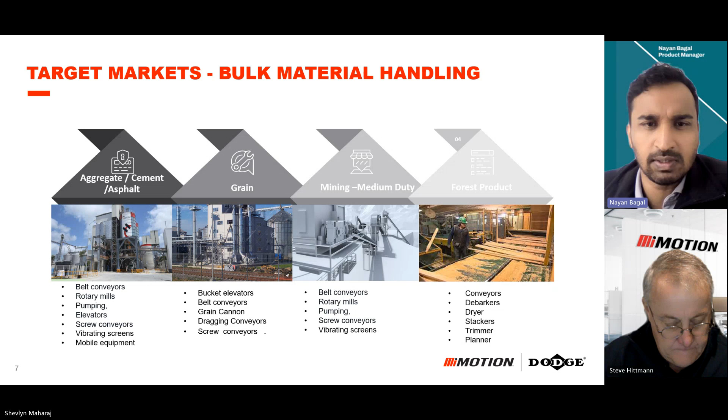Steve, would you like to?

As Nayan mentioned, and as I mentioned before in our introduction, both Dodge and Motion have had a fantastic relationship over the last 40 years, both in Australia and over in the US. Actually, over in the US, Dodge is Motion's number one supplier as far as revenue is concerned. So we hold their relationship very close to us, and it is very valuable for both us and for Dodge here in Australia to cover that bulk materials handling market.

Thanks, Nayan. Yeah, thanks, Steve. So now let's move to the product. The target products are torque arm, motorized torque arm, which is gearing, ISN bearings, Raptor, and CEMA.

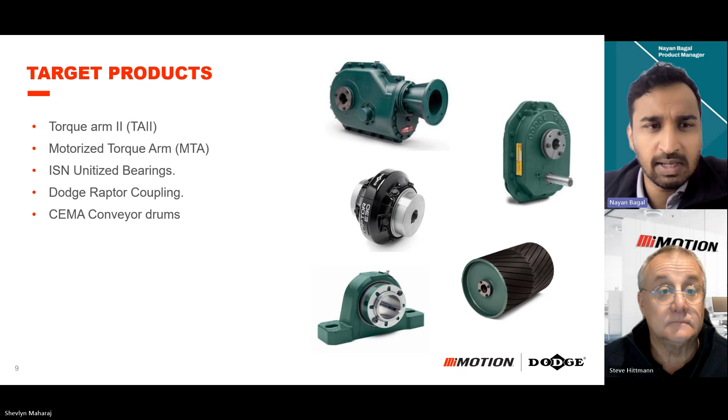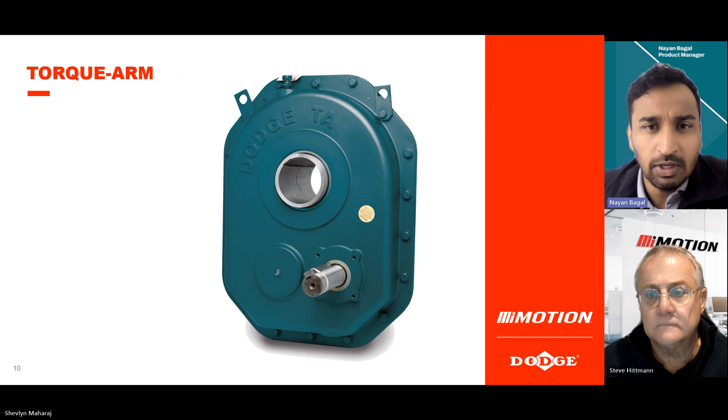Let's start with torque arm, or we also call it torque arm 2. This is our belt-driven gearbox. As you see in the picture, this is the product which we actually introduced first in the market, and then eventually we came with the next product range.

So the roots are pretty old. It goes back to 1949 or 50, where we initially introduced a belt product or belt-driven gearbox, and then subsequently in future years, with a lot of R&D, we came up with the screw conveyor design in 1962, followed by the twin taper bushing, which makes gearbox installation and removal pretty easy. That innovation in 1972 changed the way gearboxes are mounted or removed from the shafts. We launched the TXT series in 1988, which is still very popular within the US, and is used widely in most industries and applications.

TA2 was the next version of TXT, launched in 2000. A lot of the time we encourage customers to actually replace TXT with TA2 because it's a new, innovative design and has been in the industry for almost, I would say, 20 to 25 years. And in 2007, we came up with the motorized torque arm, where we decided to produce a gearbox where we remove the belt drive system and make it more compact and a clean drive, where you can mount the motor onto the gearbox and it becomes a motorized torque arm.

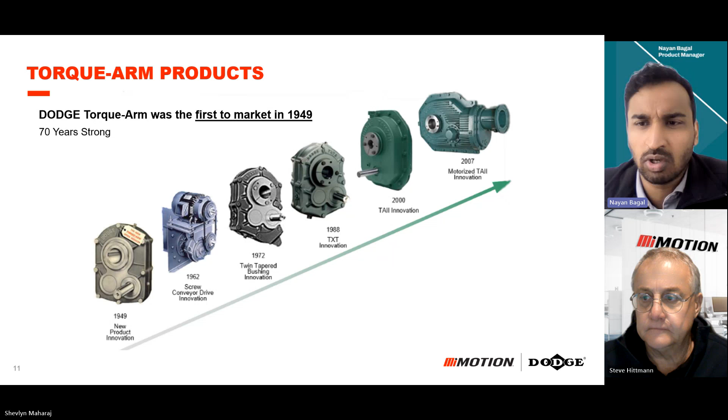In TA2, again it has a pretty long history, and we say it is a shaft-mounted belt reducer. It obviously requires V belts to drive it. Standard ratios are 5, 9, 15, 25, 40. However, with the belt drive, you can actually achieve numerous speed requirements. That's the reason this is still a very popular drive within the industry with the belt drive. Twin taper bushing is part of this drive, so you need the twin taper bushing to mount this box onto the shaft or for its removal.

They are designed for very high duty service. They can work very well with harsh environments, high shock loads, dusty environments, and where durability is very critical, or you can't afford downtime. That's where this product goes and performs really well.

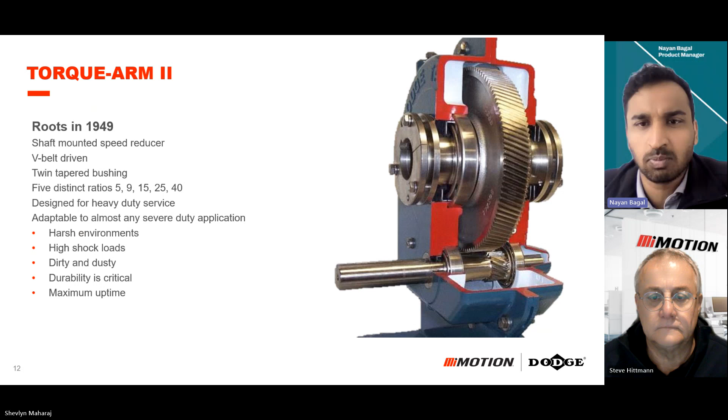In TA2, we have almost 12 sizes, starting from size 0 to size 12. There are a lot of accessories which go along with that, which help improve the performance of the gearbox. Our TA2s are designed with AGMA standards, which is the American Gear Manufacturers Association.

The taper roller bearing is part of this gearbox, which I'll talk about in the next few slides. This gearbox has a backstop - it's an additional feature if you want it, and that can work with EP additives. The primary oil seal is made up of a very high quality rubber material, which has a temperature range of minus 40 to 150 degrees.

It can be mounted straight onto the shaft of the twin taper. It has a screw conveyor arrangement as well. It can be mounted vertically or at an angle as well.

Some applications require the gearbox to be mounted at a certain angle, and that's where we get involved, suggesting what sort of oil level needs to be maintained, or any other precautions or additional accessories the customer needs to purchase while purchasing the gearbox. Again, standard ratios pretty much cover most of the speed requirements, which makes it easy to replace other manufacturer boxes.

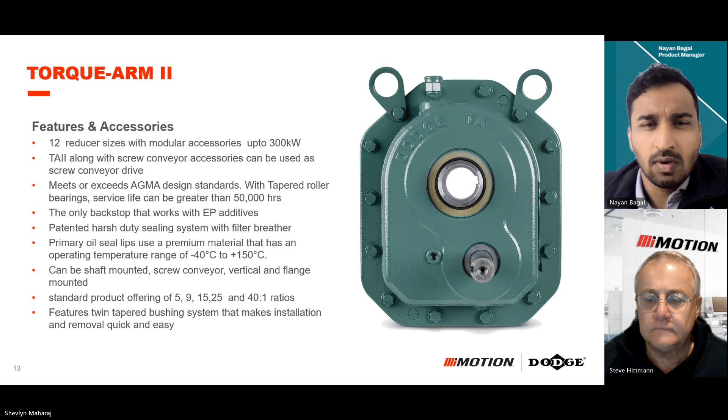About the twin taper - this is some sort of a pioneer thing which Dodge developed, and it has been popular for so long. This is one of the best features of our gearbox, where mounting and dismounting become very easy. The twin taper means you actually get twin taper bushings, which are two bushings.

One comes on the front of the gearbox, one comes at the back of the gearbox. The way these bushings are developed makes mounting this gearbox onto the shaft pretty quick. The best part is the dismounting.

If you have to take off the gearbox for any maintenance purpose or checks, it really takes 15-20 minutes to remove the gearbox.

However, most of the time, if the gearbox runs for years and years, you may have to gas cut the shaft, or it becomes very hard to remove the gearboxes. We have seen some customers, and heard stories about customers having nightmares trying to remove these gearboxes from the shaft.

Imagine you have a conveyor at a high tower, and something fails at night, and you have to take off the gearbox and put a new one. These things make it so easy. Otherwise, you have to cut the shaft and make a new pulley or new shaft, and that's how this became very popular for installation as well as removal.

Now, in twin taper, we actually have two designs. We have a standard twin taper, which is the topmost image, and the bottom is the short shaft. A lot of other products or gearboxes have a much smaller shaft length requirement and width.

That is because we use AGMA standards, our gears are much wider. So our gearboxes have a much wider width compared to others. So when you're trying to replace other boxes, you may find that the shaft length or the key seat is not good enough or doesn't have sufficient length to put the Dodge box on it.

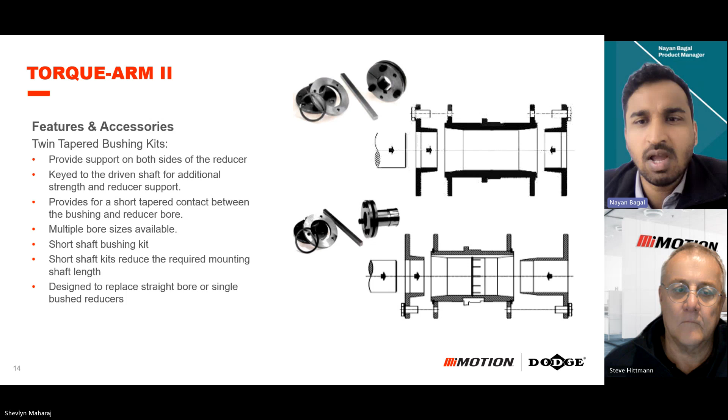That's where the short shaft bushing comes into the picture - on the right hand side bottom, there is an elongated portion within the bush itself, which supports the shorter length of the existing shaft. So if we are trying to replace a competitor box, we don't encourage or request the customer to change the shaft. We can still manage with the existing shaft using the short shaft bushing, and we still install a Dodge gearbox on it.

Bearing is again one of the important parts of the gearing, and what Dodge has done over time is try to understand the causes of problems and failures on these gearboxes, and we try to address all those problems when we develop these boxes.

In most cases, almost all competitors use either spherical roller bearings or ball bearings in their gearboxes. What Dodge uses is a taper roller bearing. So all our TA2 or MTA comes with taper roller - each and every bearing is a taper roller bearing, because these boxes will always experience thrust load, shocks, vibrations, and taper roller bearings are the best among all to handle those kinds of shock loads and thrust. That's where I think we score well, supplying all the boxes with a taper roller bearing.

Our L10 life of these bearings is 50,000 hours. As you understand, L10 life is sort of a calculated life considering all the factors, whether it's the temperature, lubrication, the dynamic loading on the bearing, the duty hours - whatever the worst situation these bearings can be withstanding.

Most of the other products are within the range of 20,000 to 25,000 hours of L10 life. We almost have double the L10 life in terms of bearing, and that increases the life of the whole gearbox. The bottom line is, Dodge is almost double the life in terms of bearing compared to the other competitor, because we use taper roller bearing, which is a high quality, expensive bearing, but we want to make sure we supply something that will last long because that's what these applications demand.

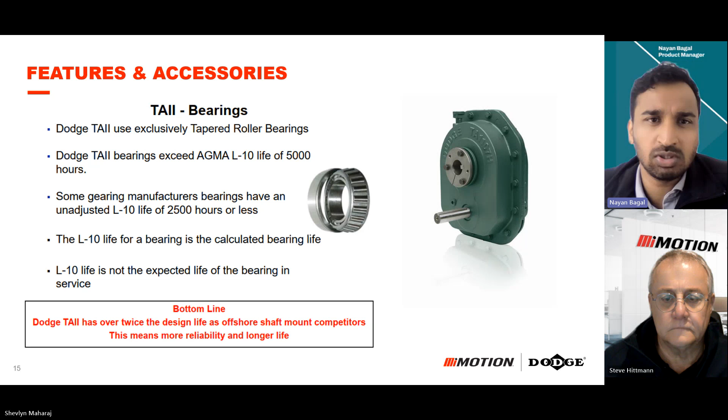Sealing is another best feature. It's a subcomponent of the gearbox which may have the least value in terms of dollar, but it plays a very important role. Sealing keeps the dust or moisture out, restricting them from entering into the box.

What Dodge develops is our seals are HNBR, hydrogenated nitrile butadiene rubber. Standard NBR seals get treated with hydrogen, which changes their structural behavior. We normally call that high saturated nitrile rubber, which makes them highly resistant to heat, highly resistant to wear, gives them high tensile strength, and high abrasion resistance. All these features add to the seals so their life goes up 5 to 6 times over the standard NBR seal used in most gearboxes.

If the seals start failing early, that's where dust and moisture start getting inside the gearboxes, which eventually fails the bearings and the gearing. So we try to address the root cause of these problems by offering better sealing.

Our sealings have a design which can be used in a bidirectional rotation of the boxes. They can work within -40 to 150 degrees Celsius, so it's a pretty decent range. We also have a harsh duty V-ring kit.

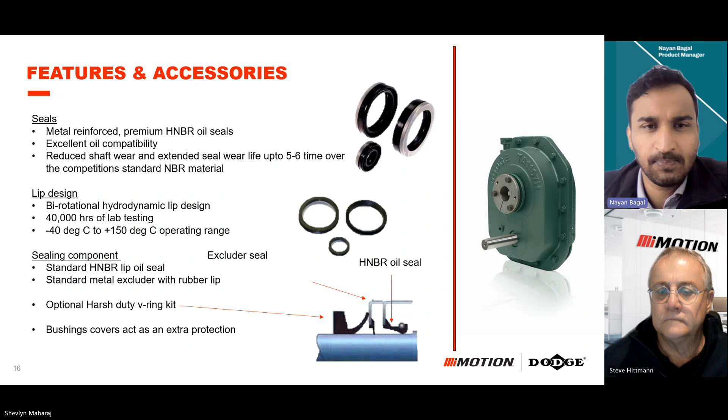Backstop is another feature. You must have noticed a lot of these conveyors are inclined, and these conveyors will tend to roll back when there is no power or the gearbox has stopped. So we need a backstop to stop the back rolling of the conveyor.

Dodge has a backstop which can be externally mounted, meaning you don't have to open the gearbox to mount the backstop. These backstops are designed to work with extreme pressure lubricant, which is not the case with other manufacturers. Their backstops will slip if exposed to high extreme pressure lubricants, which means they can't use good quality lubricants, and that impacts the life of the whole gearbox.

These are lift-off style backstops. Their capacity is pretty high, about 350% higher than the sprag style. They work without any failures and give a good feature to avoid the rollback of these conveyors.

As I said, we don't have to open the box. They're externally mounted, so it's a very neat and clean mounting, and you don't actually touch the warranty of the gearbox.

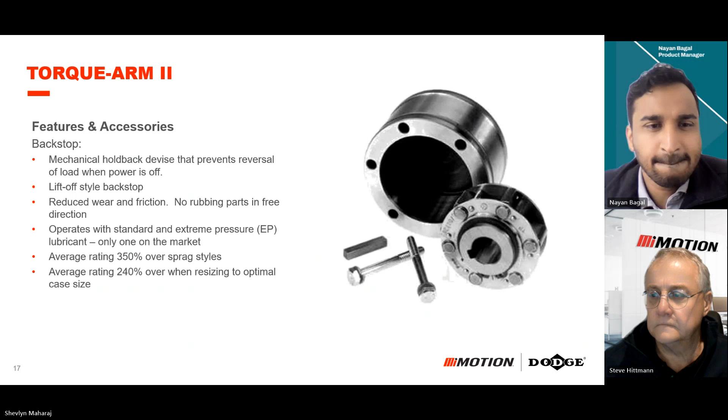We do have covers as well, open cover and closed cover. The open cover comes on the pulley side, and the closed cover at the back of the gearbox protects the bushing and the sealing. The twin taper bushing tie rod kit is a must.

You need to have a tie rod to attach the gearbox to the structure, and then you need a twin taper bushing to mount the gearbox onto the shaft. That is supplied with the key as well, so it's a very secure connection between the gearbox and the shaft.

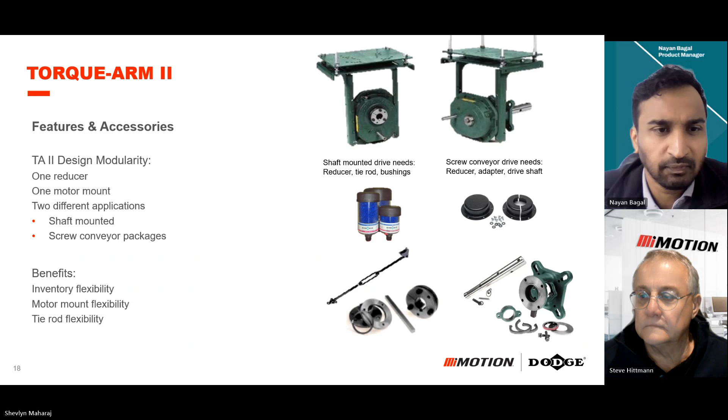Moving to a motorized torque arm, this is the next generation of the TA2, where pretty much all the innovations done in TA2 have carried forward to MTA. On top of that, we removed the belt drive and started using a direct motor on it.

The MTA has a variety of ratios. It ranges from 17, 18 up to 65 or 70. We have 8 sizes in this, and that's pretty much what we stock in Australia.

This is a good combination where the customer wants to get rid of the belt drive and install a clean, neat drive like this. It's very popular on bucket elevators or belt feeders, or conveyors where we have compact space, and a lot of the time customers use dual drives on either side of the pulley. They've been pretty popular since they launched in 2007.

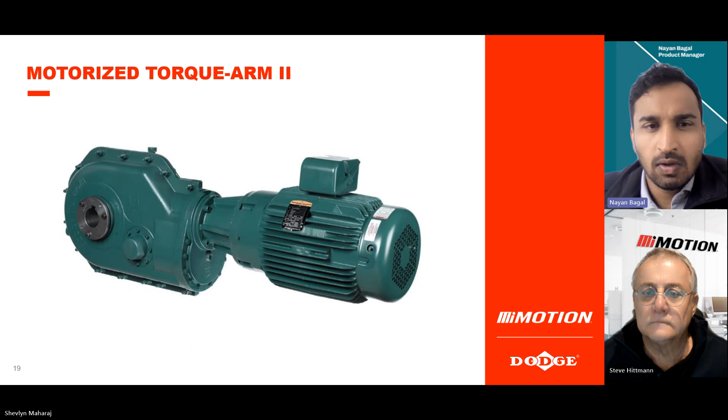They're rated for AGMA, designed to AGMA standards, so heavy gearing, wide gearing, they can go up to 75 kilowatt installed power. We also came up with new sizes - size 9, 10, and 12 - which can go to much higher ratings, and we can now supply those as well.

We don't stock them in Australia currently, however we have them in the product line now. So if anyone has a larger kilowatt requirement, we can actually supply them.

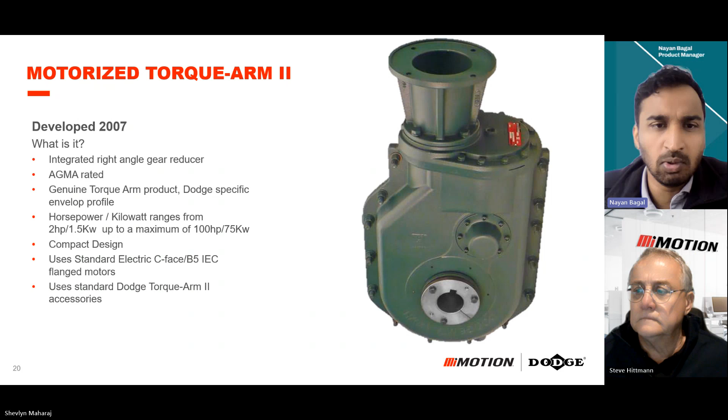They can be installed with a C-face B5 IEC motor, so any make of motor is good enough - you just need a B5 IEC flange and use the same standard accessories which we use for TA2. So the accessories for the belt drive gearbox and for MTA are the same, which reduces your inventory. If your plant has TA2 and MTA together, you can still maintain minimum accessories required because it's pretty common between these two boxes.

In other manufacturers' designs, the pinion bearing is only supported on one side and not the other, which leads to failure from vibrations at high speed and shock loads, eventually causing the pinion to fail. Our design has the input shaft and pinion made of a single metal piece. In contrast, other manufacturers' pinions are press fit onto the input shaft, which becomes a weak link when transmitting torque and a reason for failure. That's a significant development Dodge has made in how we mount our input pinion.

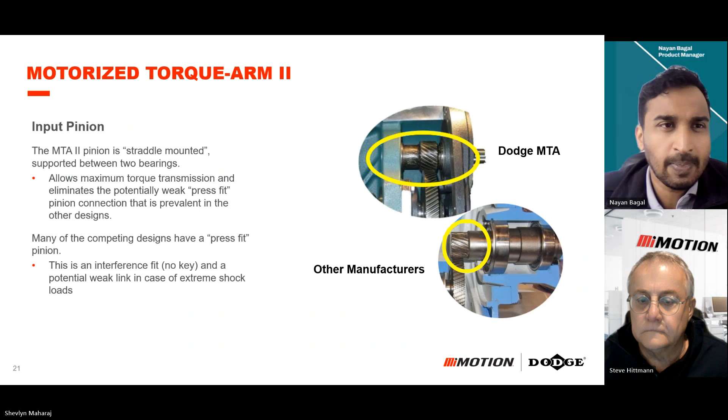As I said, these motors require a B5 flange to mount or attach to the gearbox. We call this a dry face because if you ever need to remove the motor for maintenance or remove the coupling, there'll be no oil leakage - the gearbox doesn't open when you take off the motor. It's a neat and clean design.

In most other cases, if you have to remove the motor or coupling, the gearbox actually opens and you have to drain the oil as well, which is not the case with ours. You can remove the motor and coupling for maintenance or checking, and the oil remains as is - the gearbox won't open, and we don't compromise on gearbox warranty. You don't have to do pre-assembly, so if the motor has a problem or failure, it's easy and convenient to replace the motor on top of this gearbox.

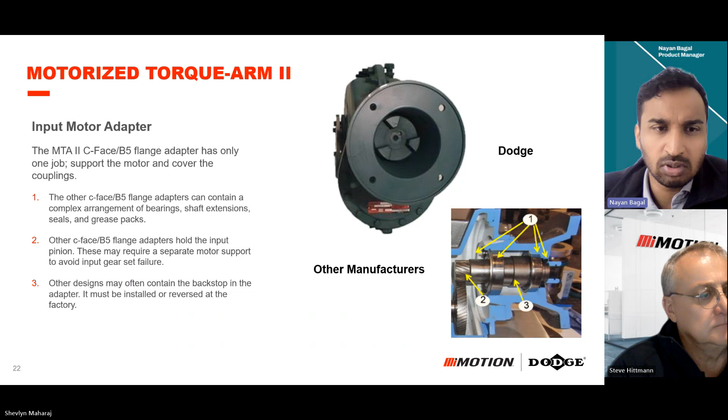These gearboxes carry the same seal as TA2, which is HNBR sealing. All the bearings in these gearboxes are taper roller bearings, so they will last longer compared to ball bearings and spherical roller bearings. The backstop in these gearboxes can be mounted externally, so you don't have to open the gearbox to mount the backstop.

So pretty much every feature introduced in TA2 carried forward into MTA. On top of that, there's a better pinion design supported by bearings on both sides, with a single piece pinion. So there's a lot of advantages of using MTA over TA2.

You remove the belt and you can still achieve good speed or various speeds, because we have ratios ranging from 17 to 65 or 70. So it's a pretty decent product, with a very compact design, to replace the belt drive.

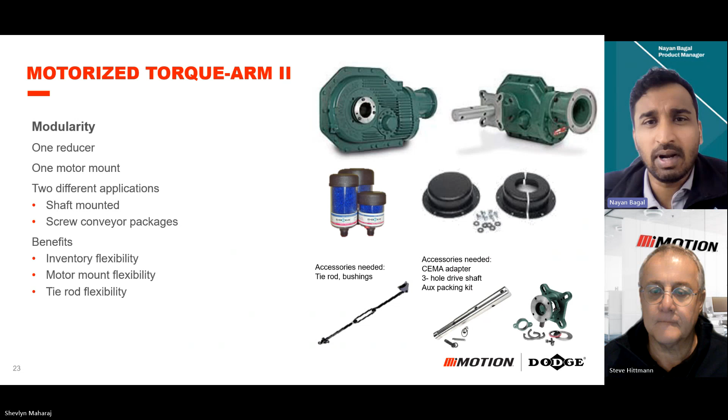About this gearing, TA2 and MTA are pretty much in stock. We have a huge stock across the entire range within Australia, and Motion is equally stocking this product across their stocking locations in Australia, covering New South Wales, Queensland, and WA. So all the sizes and all the accessories are in stock with Motion and Dodge.

So if you have any specific requirement, we are pretty quick to supply. Our turnaround is very quick. We have supplied before where we talk to the customer, provide a solution, get the order, and supply by end of the day, and the next day morning the drives are installed. Our turnaround time is pretty quick because of the way we carry stock along with Motion across the country. So if you have any requirements specific to that, we are pretty quick to supply and solve the problem.

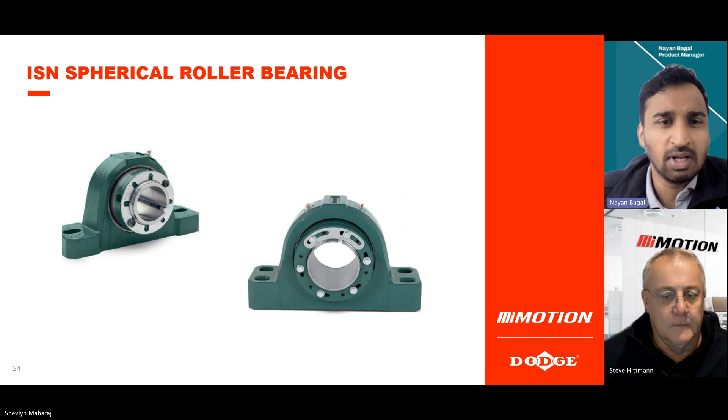Moving to the next one is the ISN. ISN is one of the products of our entire bearing range. This is a spherical roller bearing. The I actually stands for Imperial SN style.

So this bearing housing unit was developed to actually replace the SN style bearing. The dimensions exactly match the SN, so bolt centers will match the SN style as well as the center height. Initially, when it launched, it was only Imperial sizes, but now we have them in metric as well.

Very popular product in Australia and globally. We stock them in our Dandenong warehouse, and again it's one part number.

You don't have to order multiple parts like what you see in the left hand side picture, which is the conventional case. We bring this bearing pre-assembled, as you see in the right side picture, from the factory. It's pre-assembled and pre-lubricated, coming as a complete assembly. So it's sort of taking it out of the box and sliding it onto the shaft to install it. We don't have to order multiple parts or do the installation or assembly ourselves.

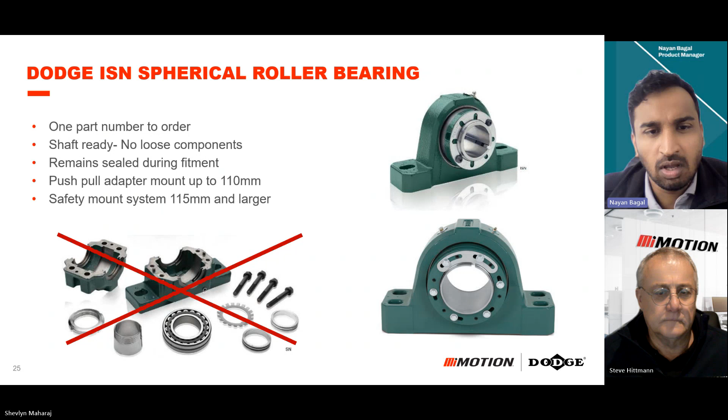We have a push and pull adapter locking system for sizes up to 110, and above that we have a safety mount concept, which makes it easier and requires much less torque compared to conventional bearings.

As I said, Dodge is the inventor, or holds a patent, on the ISN integral adapter system. What we use is an adapter sleeve, used along with the lock nut, to mount these bearings, which makes mounting and dismounting pretty easy. It naturally takes about 15-20 minutes to mount the bearings, and we do not need experts or specialized fitters to mount them. If we follow the manual instructions, it's pretty quick to install.

What we need to do is, depending on the diameter of the shaft, decide how many rotations to give the lock nut, and that automatically sets the clearance in the bearing. That's it - easy installation in 15 minutes. Similarly, when you reverse the lock nut, the adapter sleeve expands and releases the bearing from the shaft. So it's a highly patented technology, which we call the push and pull mount arrangement.

So again, the whole adapter sleeve will be touching the shaft, so it achieves the clearance and it will set like that. The seals are, if you look at the picture, actually not touching the shaft.

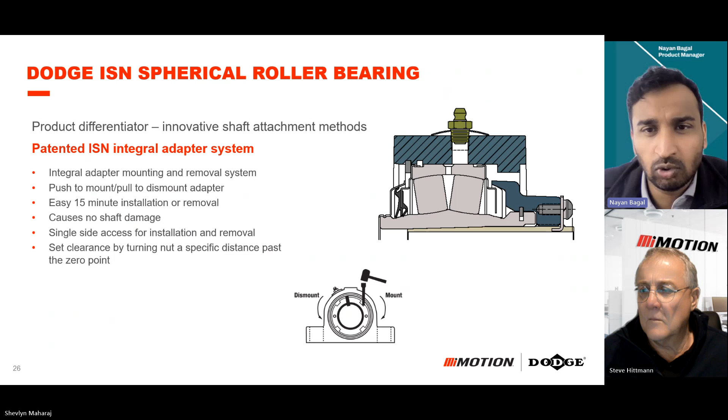They're on the inner race of the bearing, and the main purpose of these seals is to protect the spherical rollers. We'll talk about sealing in the next slides, but this bearing also comes as non-expansion and expansion. By easy switchover of the locating ring between the slots, we can convert this bearing from expansion to non-expansion.

Again, like in gearing, we invested a lot of R&D and time to develop good seals for this bearing, because I believe seals improve the life of any mechanical product like gearboxes or bearings. Our seals are the Trident triple lip seal, made of nitrile rubber. They have contact at three different locations, and the way these seals are developed means they last long in high dusty and dirty environments.

We have standard Trident seals. We also have labyrinth seals, which are normally used for high temperature and high speed applications. We can supply covers also to add for additional safety and protect the seals. Depending on the application or temperature range, we can supply labyrinth seals as well, and we stock them in Australia. So ISN with the labyrinth seals and ISN with the Trident seals are stocked in Australia, and we supply them per the customer requirement and the application requirement.

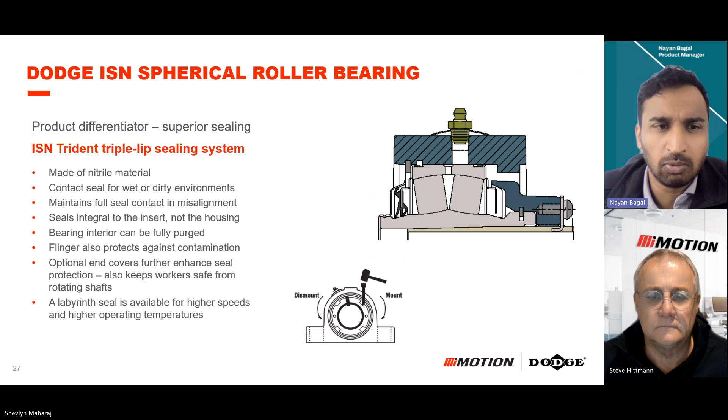If it's a new design, we gather some information and then suggest the best solution for the application. A lot of times we've seen the Trident seals failing, so we go to the root cause and try to see if we can offer a labyrinth seal which can solve the problem.

The seals are designed in such a way that they have a chamfer or tapered angle when they touch the inner race, and the design is meant to push out the old grease and the dust.

So how we actually grease these bearings is when the bearings are in application and running, that's where we start pumping new grease into the bearing, which pushes the old grease along with the dirt and moisture out of the bearing. You keep putting grease in until you see the new grease coming out or purging from the seals, and that's how we ensure the old grease has come out and it's now filled with new grease.

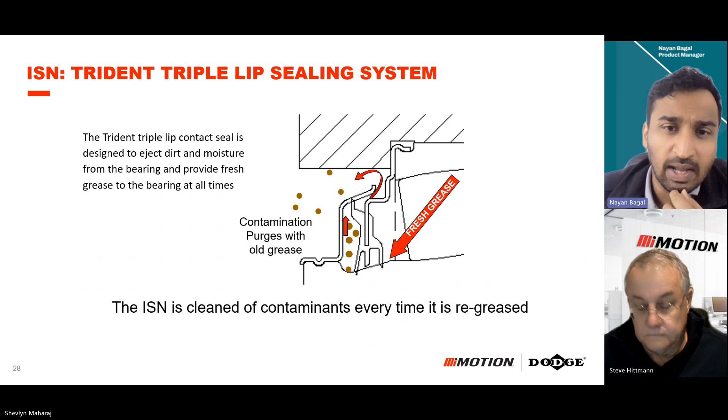This makes the maintenance of this bearing pretty easy. It also reduces the greasing requirement. For an initial fill, we're talking 60 to 70% less grease, and for the refill, about 15 to 20% less grease compared to a conventional bearing. So the seal design helps to re-grease this bearing easily, and we can save a lot of time and money on greasing.

ISN has a few other styles, or different style bearings. We have two bolt design, circular flange, four bolt design, IP style bearings, take up units, and square flange. They all have a common insert, so we have a single insert that can be used in all these bearings. Our insert is a complete unit which has the lock nut, sleeve, the bearing itself, and seal.

So this comes as a complete unit again, and you can just replace that into the existing housing if you don't want to change the housing.

This is the insert for higher capacity or higher diameter bearings, 110 and above, which we call the safety mount insert. Again, this is common for most of the spherical roller products.

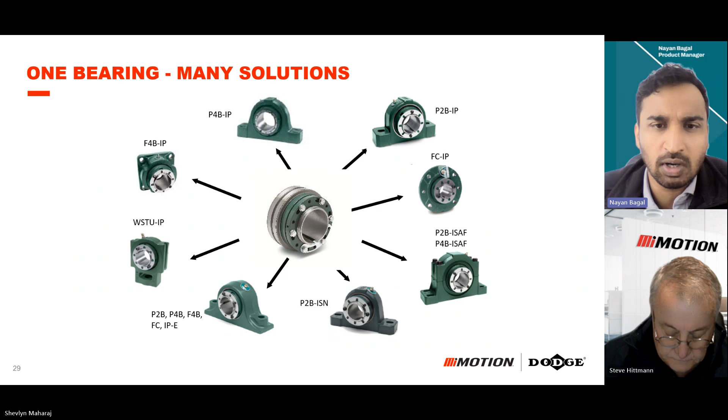ISN, as I said, is factory sealed and greased, so you don't have to assemble that at your location. Not every plant has a good facility to assemble these bearings in a clean environment, and most of the time the problem starts when you don't have a clean environment while assembling. Dirt gets trapped even before the bearing starts operation, and that's where failure starts, because once dirt gets trapped between the rollers, it leads to eventual bearing failure. So we remove that problem by assembling the bearing in a controlled factory environment by experts.

The patented sealing arrangement maximizes the life of this bearing and improves the way sealing of this bearing is conventionally done. Also, the way the seals are designed makes lubrication or maintenance of these bearings very easy. We save a lot of money and time on the grease fill as well.

It arrives in one piece, so it's ready to install, in sizes from 30 to 140 mm. We stock them in Australia, and if you have any specific size requirement, we also stock them in Imperial, because a lot of machines designed in America have Imperial ISN on them, and we can supply these Imperial ISN as well. Optional end covers are for additional safety.

We stock them in Australia as well. You do not need any specialized tool to mount these bearings. We do stock C spanners to rotate the lock nut, but that can be done with your existing equipment as well. So it's not necessary to have any specialized tools or special skill to mount these bearings.

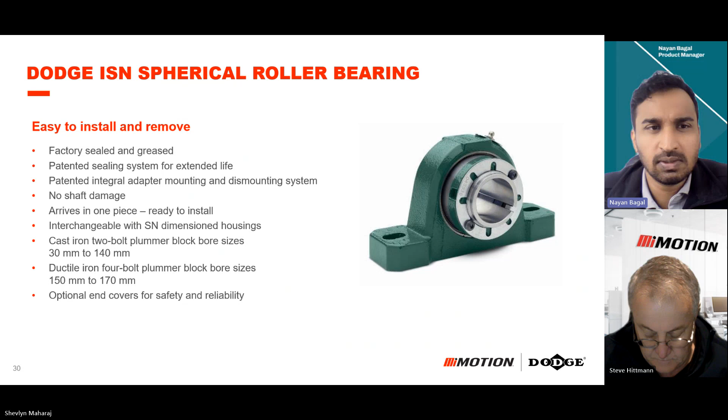Our next product is the Raptor coupling. A pretty popular coupling, launched 4 to 5 years back, and it's a big hit in the US and in Australia as well. It's from the range of our tire coupling range, used in the pump industry, compressor industry, material handling, cement, and we have good success of this product across the globe and in Australia.

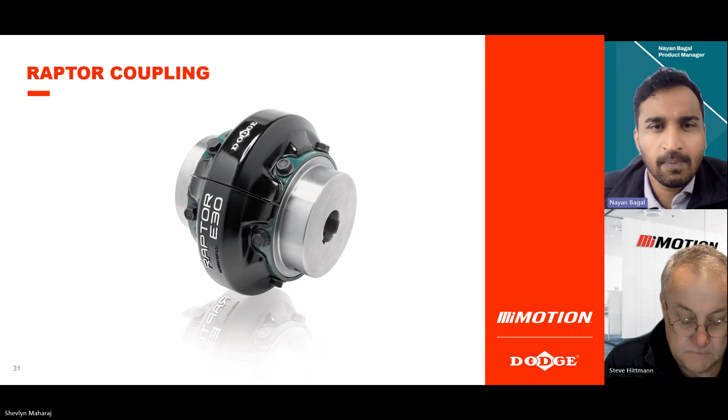We have 12, 15 sizes in this. They can come in close couple or spacer design. A lot of times customers do have spacer requirements, so we come with the standard spacer design as well. We have a patented V-lock technology or design which improves the capacity of torque transmission when we install these couplings.

We also have improved vibration or shock damping. The way the material of this coupling is used, or the rubber we have developed over a period, has a high capacity to take vibration and shock loads.

It's pretty easy to mount, with standard procedures. We have elongated holes for easy adjustment and mounting. This is the only coupling in this kind of style, or in the tire coupling range, that offers a 5 year limited warranty. No other competitor product can offer 5 years warranty on the element of this coupling.

The hubs are standard, so you can get pilot bore hubs or pre-bore hubs, or taper lock hubs as well. We supply a spacer extension as an additional feature, and we stock these all in Australia, in our Melbourne warehouse.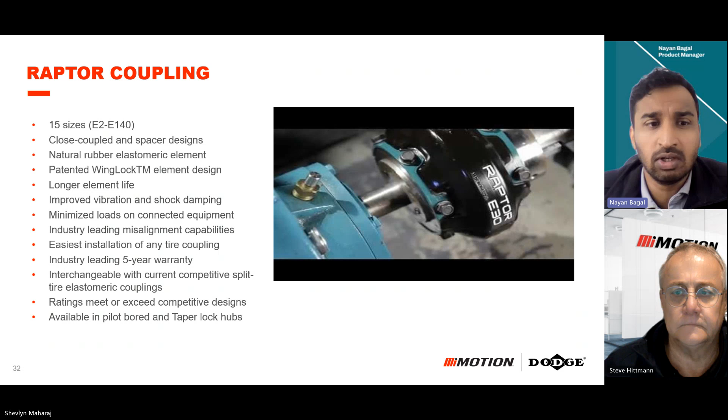Again, what we use is natural rubber compared to most other competitors who use a polyurethane sort of material for this element. Because we have expertise in natural rubber for the last 50 years, we have developed the element in such a way that it lasts longer than the polyurethane one. What we have seen over time is the life of this coupling is around 5 to 6 times more than the standard polyurethane element which other manufacturers use.

They're very easy to install. They have slotted holes, so you can make small adjustments while mounting them if you're replacing couplings. The best part is they can be interchanged with Rexnord Omega or TB Woods hubs, so you don't have to buy the hubs if they're in good condition. You can just buy the element and replace it on the existing Rexnord or TB Woods hubs. We can supply just the element as well, and you can install it on the existing hubs.

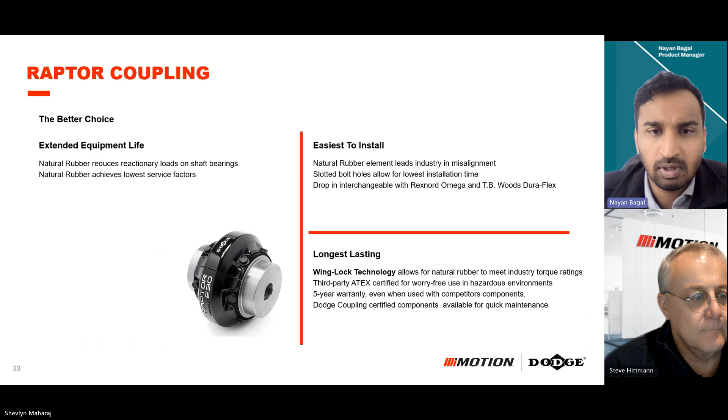The wing lock technology, what we mean is, if you look at the design, the rubber element spreads across the metal portion and covers all areas other than the bolt area, which we call the wing kind of design. This maximizes the bond between the metal piece and the rubber element. Because of this, we ensure we can easily transmit very high capacity torque, going up to 38,000 Newton meter torque transmission capacity with this wing lock design.

This also gives us confidence to offer 5 years warranty, which nobody else can give in the market, because most couplings start failing at their joints or at their bond, eventually leading to complete failure of the element. So you can see the quality difference between the Dodge product compared to the other manufacturer.

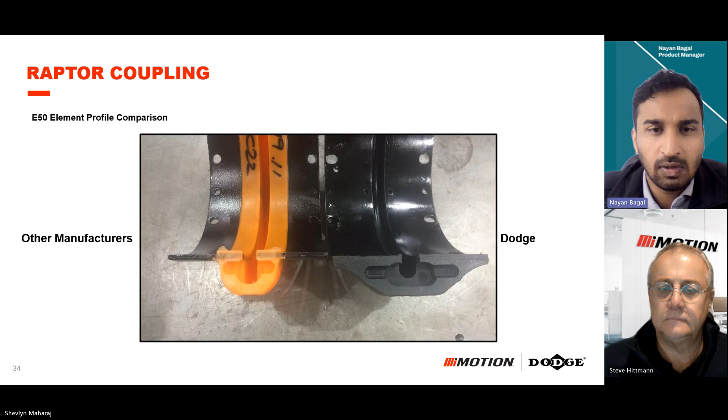Again, based on 50 years of experience, we use natural rubber to develop this coupling. They can be used in high flammable areas as well. They have exceptional resistance to breakdown due to moisture, so they can be used in moisture areas as well. They have superior thermal conductivity, so they can be used to dissipate heat built within the application. We have variety of features developed and involved in this product development, which allows it to be used in various applications, whether high moisture or high temperature environment.

We also have couplings elements to be used in high chemical exposure applications as well. We call them a different element, called armored element, which is in the next slide. These are normally used for applications which have high contamination or high chemical exposure.

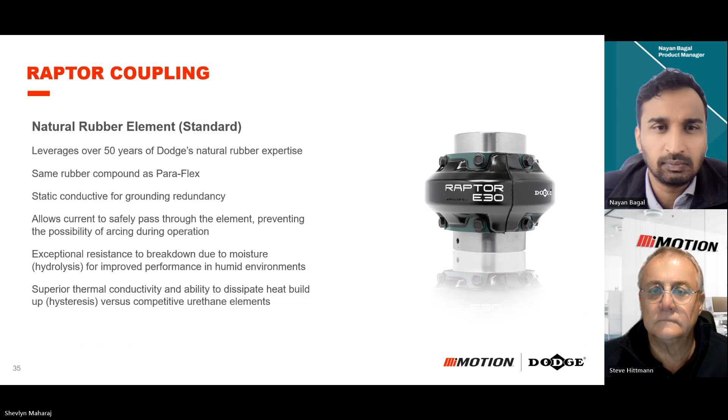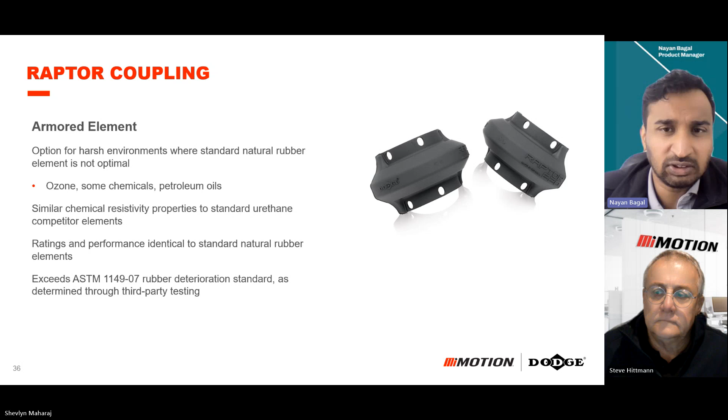Some chemicals like ozone or petroleum oils can be exposed to this, and the standard natural rubber may not stand against that and may start failing eventually. So we have armored elements which can be used for those specific applications. Any gas, pump, or petroleum industry, we can supply these elements as well. And the standard elements can go and fit on other manufacturers' hubs, so you don't have to really replace the hubs.

Our couplings are actually ATEX certified, so it's a third-party ATEX certification. It's not done in-house. It's a third party who actually reviews, analyzes, and studies the coupling elements, and then certifies it. So they are ATEX certified.

All our couplings, or elements, come with 5 years warranty. So we have a warranty card within our box. That's pretty much a distinct feature that distinguishes us from the rest of the pack, where we are confident to offer 5 years of warranty because of the experience we have in the coupling, and the way we have developed the element over the last 50 years.

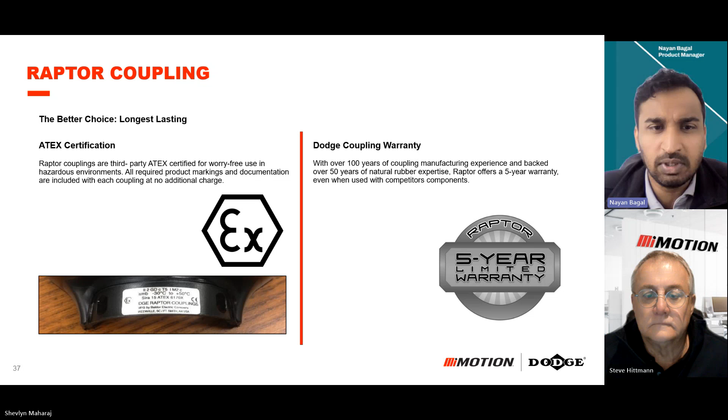Our next product is CEMA drums. CEMA is the Conveyor Equipment Manufacturers Association, which is widely accepted and regarded standard globally. We develop and design these CEMA drums based on that, following the specification CEMA has laid down, which is pretty much accepted all across the industry.

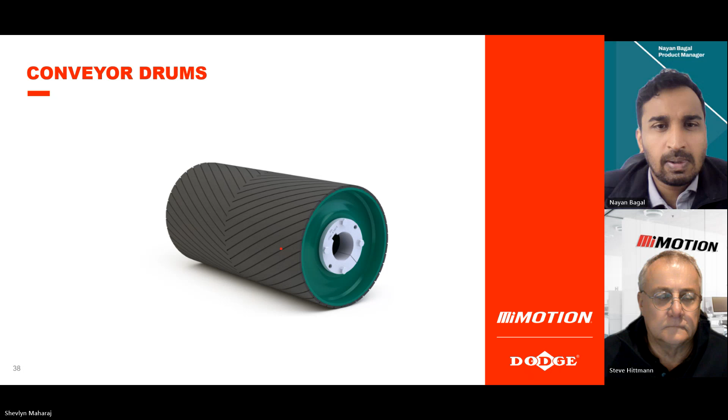Again, it has a long history, launched in 1910 as the first cast iron pulley, and eventually over the period we have developed these pulleys. We introduced HE bushing, XT bushing, and came up with mine duty pulleys, which is MDX. We also have the capacity to build engineered pulleys. We have standard pulleys in stock, but we can also design and manufacture pulleys as per customer requirement. We have various lagging options we can supply on these pulleys, such as rubber lagging, D-lags, and ceramic lagging. So there is a good capacity within Dodge to supply various kinds of pulleys, whether standard or non-standard.

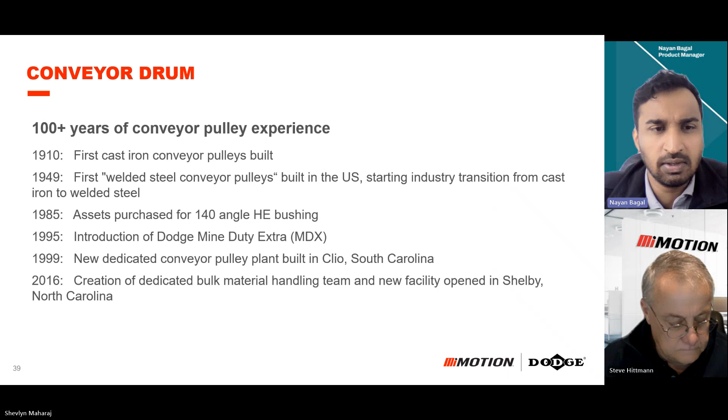All our drums are now supplied with the XT bushings. The XT bushing has a 9.5 degree taper angle, which makes it very easy to put on and off while trying to mount it onto the shaft.

All our pulleys have arc welds, so we only follow arc welds for the pulley, which actually makes the pulley last longer in high vibration, high shock applications.

Our standard is vulcanized SBR lagging. That's what we supply on most of our pulleys if you ask for a lag pulley. But optionally, as I said, we can supply D-lag as well as ceramic lagging.

Custom diameters are available on customer demand, but what we stock in Australia is standard diameters and standard width. So most of our pulleys can be used as is to replace existing pulleys, because they support the standard belt width and the standard diameter which is on existing drums.

We do not supply shaft, so shaft can be bought locally and installed on these pulleys or drums. We supply the complete pulley and the XT bushing to mount on the shaft.

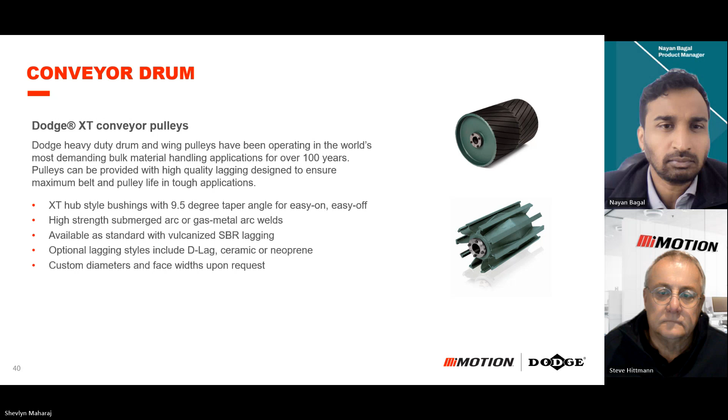This is a conventional design, what is normally done. If you look at it, you have a bushing. Most of the time, the conventional ones use either taper lock bushings or QD bushing. On top of that, there is a hub, and then there is an end disc. So obviously, because you're increasing the components, there are multiple locations where you have to weld these components together.

When the shaft gets deflected, and obviously the shaft will be under deflection, under load and stress, the hubs and end disc start getting deflection as well, and the outer weld of these hubs gets into the stress. That's the reason where the welds start getting cracked and then the pulley starts to fail.

What we have developed is what we call the integral hub design. Our hub and end disc are made of one piece. We do not join them together, which actually removes the extra weld between the hub and end disc. So the only weld we have is at the top, where it is connected to the rim, and that is again an arc weld.

By removing the additional welding, we actually remove the weak links or weak points within our drums, and that ensures that our pulley lasts longer.

We do have the center disc depending on the width of the pulley, because for larger belt widths, when the pulley face width is very large, you still have to support them at the center. We supply center discs as well, which are pre-fabricated within the factory.

On lagging, again, we have non-lag pulleys as well. If the customer would like to have lagging done themselves in Australia, like ceramic lagging or something, we can supply that. Otherwise, our standard pulley comes with the rubber lagging.

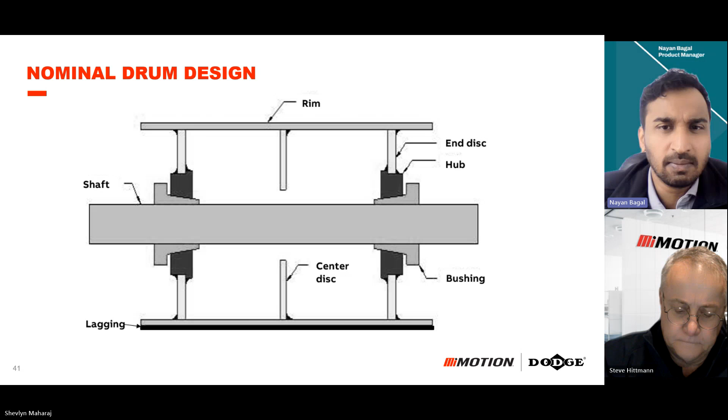This is again how the conventional design works. Due to shaft thermal expansion and all, the taper bushings or QD bushings actually tend to move outwards. And when they try to move outwards, they put a lot of pressure onto the end disc. This is an exaggerated picture, but this is how the end disc starts bending, and that's where it starts failing.

The XT bushing actually makes this installation very easy, where it doesn't put a lot of stress onto the welds of these pulleys, and it makes it easy to install and take off, as well as improving the life of the whole conveyor drum. So the XT bushing makes installation and removal easy, as well as reducing the stress getting onto the welds on these conveyor drums.

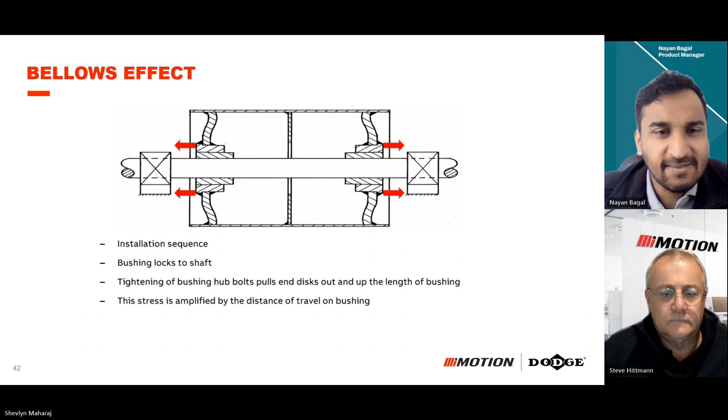This is a picture of how Dodge drums are supplied. This is all fabricated and manufactured in the US. We supply them lagged. Every pulley will have a tag on it. It's a very high quality product which we supply, like we supply our gearing and bearings. Again, it can go up to 70,000 psi. They control the repeatable process, so it's all done within our multiple factories in the US.

You can just look at the picture, you can see the quality. This is the design with the herringbone. Most of the pulleys we bring are like this, but again, we can get diamond design as well if the customer wants, or ceramic lagging if the customer would like to have them.

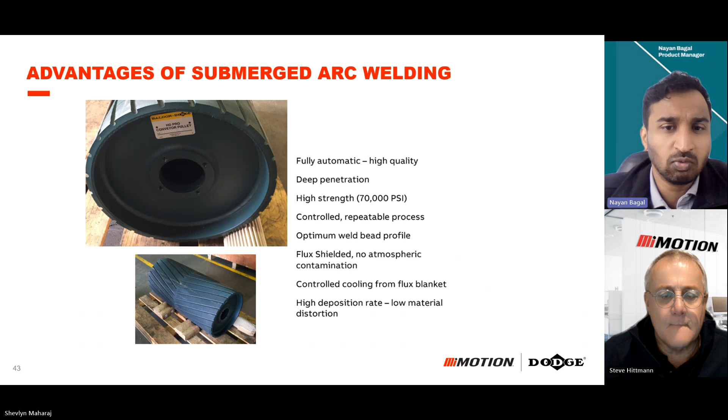A comparison of how the local manufacturer compares - the left-hand side picture is a local manufacturer within Australia against what we have with Dodge. If you look at the thickness of the lagging, our lagging is almost double.

The quality of the lagging determines the life of the pulley, because eventually the lagging will shed off when it starts running on top of the belt. That's why high quality lagging is very important. They're all hot vulcanized lagging, so what we use on our pulley will sit on the pulley rim forever. It won't peel off - it will obviously shed off because it's rubber, but it won't peel off from the base of the lag. That's the difference.

Again, the shaft is pretty much welded on the left-hand side. However, our shafts can be slid in and installed with the XT bushing, which makes it easy to put on and take off. That's the sort of quality difference we see when we compare against Dodge.

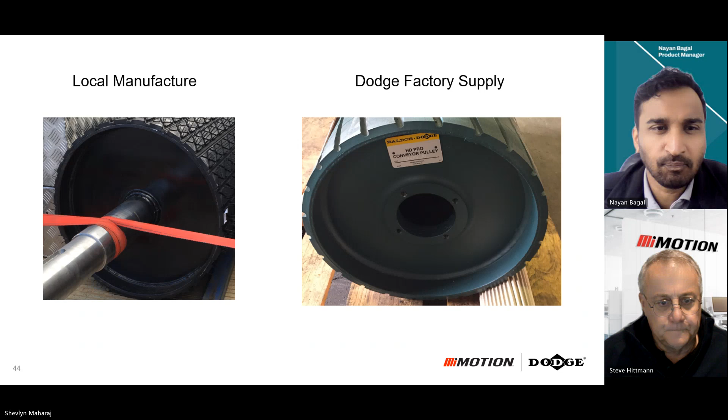That's pretty much our 5 targeted products which we'd like to promote in the medium-sized bulk material handling industry. If you have any specific questions, I'm happy to answer.

Well done, Nayan. That was very comprehensive, mate, and really appreciate your efforts. Thank you. Shev, do we have any questions outstanding?

Not yet, we haven't had any questions.

Okay, I might just do a quick wrap up. Some of the points I picked out - Nayan has fantastic expertise, which is a fantastic benefit for both Motion, our staff, and our customers. His expertise is very experienced in conveyors, conveyor drives, and actual conveyor selection. Very well experienced there, Nayan, and we really appreciate that.

That's backed up with our 40 years of relationship in Australia with Dodge, which has been a fantastic ongoing relationship, and also backed up by our relationship in the US with Motion and Dodge. Availability of stock is a real positive - we've placed stock in Queensland, New South Wales, WA, and Victoria, so stock availability should be pretty good.